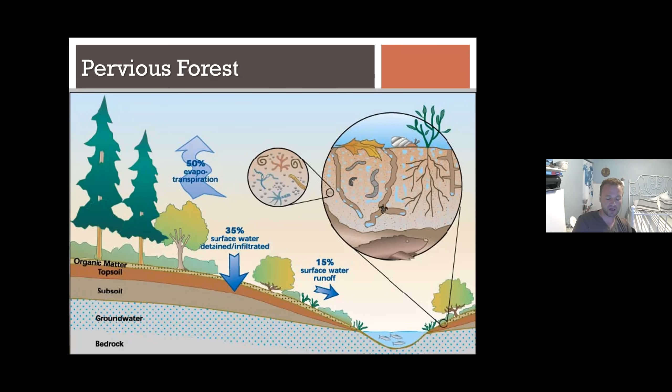And then once it does reach the ground, 35% of the water soaks into the soil. So some of it just stays on the surface, some of it soaks down deep into the aquifer, and very little of the water actually runs off into what will be a creek or a river or a lake or Puget Sound.

And so what's happened though is that we've come in and developed, and we've replaced these what are called pervious areas. Pervious just means water soaks into it, with impervious areas. So roofs and driveways and parking lots and roads, gravel areas. Pretty much most modern development is a hard surface of some kind. And so one, it almost completely eliminates any evaporation and transpiration mechanism.

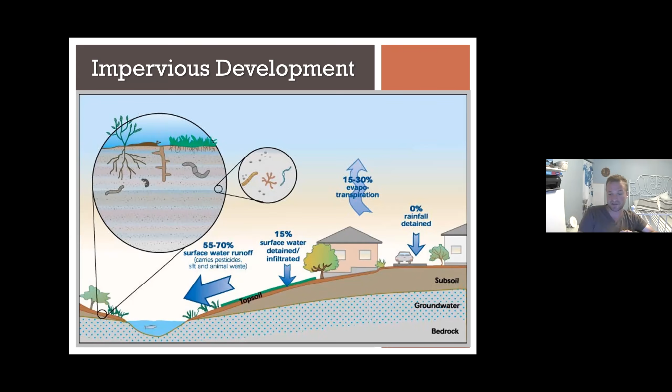So only about 10% of the water, well, this is 15 to 30, I think it's actually a lot less than that, goes back up in the atmosphere after it hits a hard surface. Very little of it actually goes into the ground at all. And as we get rid of more and more landscaped areas, because we're putting down denser and denser development, less and less water gets into the soil and more of it runs off. So almost all the water runs off, and this creates all kinds of issues to the downstream.

So one of the biggest issues is flooding. I like to explain this as people getting on as traffic. So if everybody's trying to get onto I-5 at the same time, everything backs up. It works the same way with rivers. If all the water is trying to go to the river at the same time, everything backs up. One of the downsides of hard surfaces that we put in is that water moves very, very quickly over the top of it.

When a raindrop falls out of the sky in a forest, sometimes it will take days before it will get to the nearest waterway. And in urban developments, it will only take about 6 to 10 minutes to get to the nearest waterway. It just moves very, very quickly. And because of that, everything can back up. We get soil erosion. Because that water starts moving so fast, it picks up particles of soil that it would not normally pick up and moves them downstream.

So not only do we end up with deeper rivers and streams and slopes starting to fail and things falling into the water because the soil is moving, but we actually get sediment deposits on the downstream. So the Puget Sound ends up filling with a lot more sediment than it normally would have.

We get a lot of pollution. So things like trash and hydrocarbons from cars and brake dust and heavy metals all get caught up in that stormwater, and then they just go to the nearest drain and go to the nearest waterway. A lot of people tend to think that stormwater is treated the same way that sewage is treated, and that's not the case. Most stormwater just goes straight to the nearest creek or stream and then goes right out into Puget Sound.

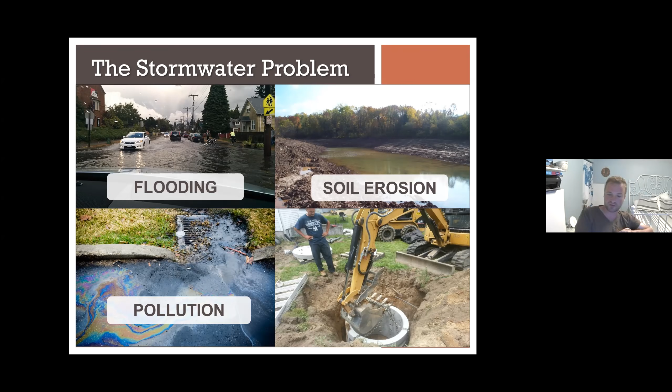And actually the #1 source of pollution to Puget Sound by a significant margin is stormwater. And then we end up with less groundwater because we're not infiltrating water. It's not going into the aquifer at all. So we end up actually mining water, because we're pulling it out faster from our wells than we are putting it back. So those are the problems that we're trying to solve, and that's why we have the stormwater systems around this area.

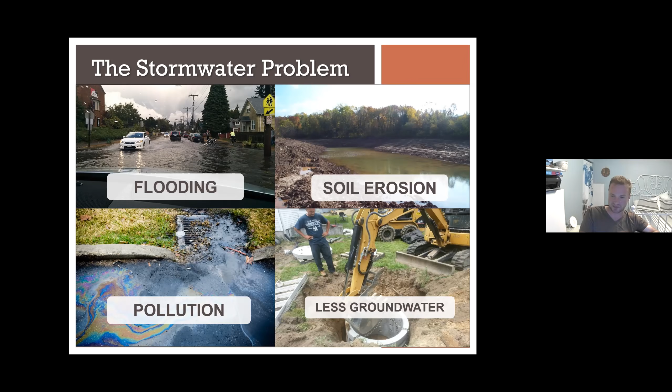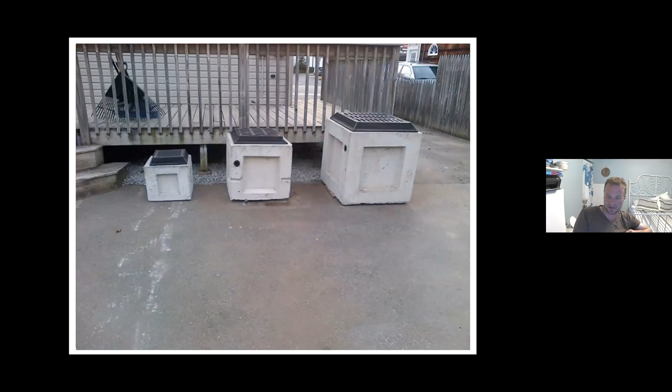So this is a standard. This is just what we would call a catch basin. I'm sure you've all seen these around. This is where stormwater goes. And this is what a catch basin looks like when it's out of the ground. It's just a big concrete box. And every one of those cutouts is a place where you would punch a hole for a pipe. And one catch basin leads to another catch basin, which leads to another catch basin, all the way down the chain until it outlets to usually a creek or a stream in the local area.

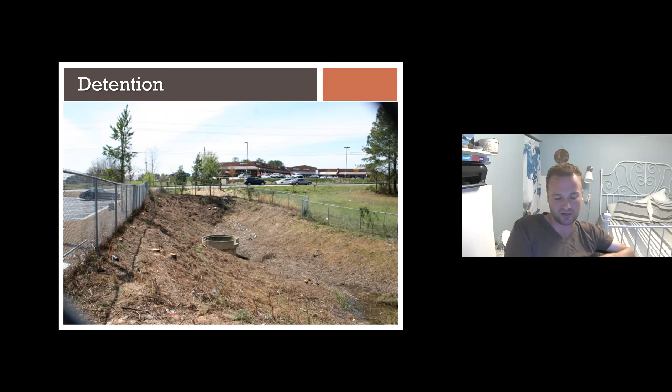So in order to combat that, they started doing this a little bit in the 50s, and it grew to much wider adoption in the 80s and early 90s. And the idea is that you dig a big hole and you let the water fill it up, and then you release it at a really slow rate. And that rate of release is supposed to mimic what a forest would release that water at.

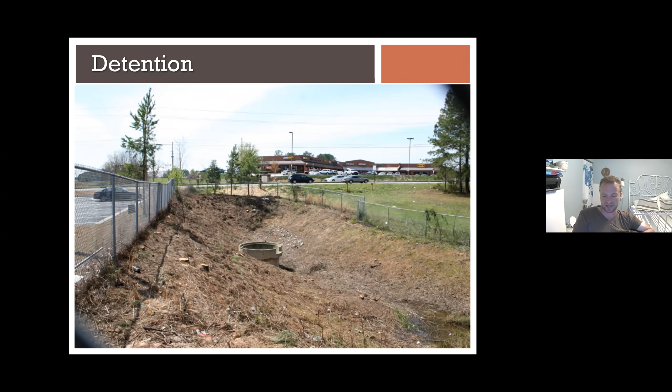So there's a bunch of in-depth modeling that goes into this, but basically you size these detention facilities to be able to hold as much water as second growth forest would. And so that's why these facilities exist. It's just basically a big volume storage area with a specially designed hole and an outlet structure that releases water at a certain rate.

An alternative to that is bioretention. That's something that we're moving more towards in this area. That's something that I specialize in. So this is just kind of a little plug for us in our program.

And this is another way of solving this problem, which is much closer to mimicking what happens in an actual forest. We're basically building an artificial forest on someone's property, or taking stormwater from local development, and you just dig a hole in the ground, you backfill it with a special type of soil, and you send water to it. And instead of then tying to a catch basin, which ties to the nearest creek, the idea is that most of the water actually infiltrates back into the soil like it would have 100 years ago.

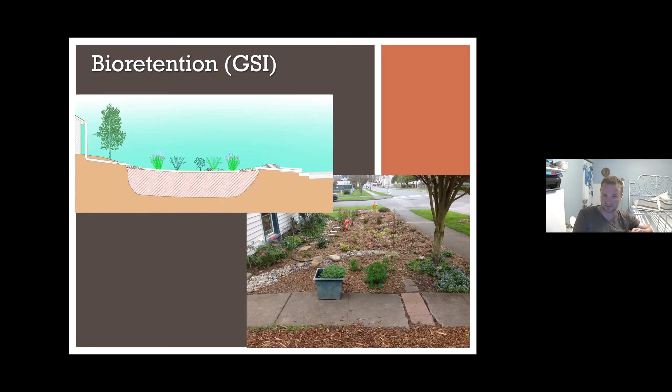And so that's the direction in general most new developments are going, but we still have to deal with all these detention systems that we put in and are continuing to put in with this current model for development that we have around here. In addition to detention systems, there's almost always some type of treatment to the water going to the system. So the most common type is called a cartridge filter system.

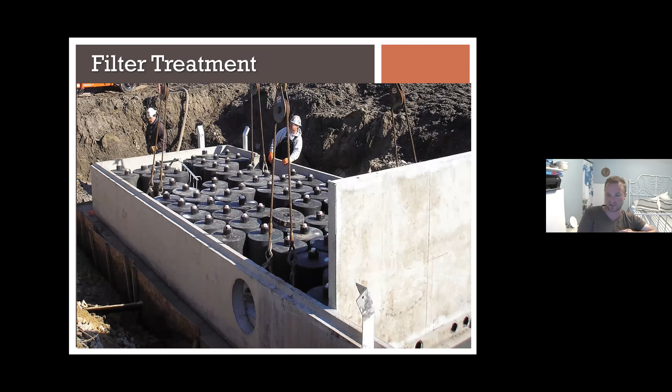We're going to go more into depth in this, but basically this is to remove pollution before it goes into the nearest creek or waterway. And it's just a giant Brita filter for the most part. It removes hydrocarbons and heavy metals and nutrients that would do damage downstream.

Sometimes you will hear people talk about detention versus retention. There is a difference between those two. Especially in Snohomish County, we don't do retention very often, but it does come up every once in a while. The difference is a retention pond is allowed to infiltrate. So it does do some soil recharge in terms of soaking water back into the soil, and detention is just pure volume storage.

But yeah, like I said, it doesn't work very well in a lot of Snohomish County because we have dense soils, and sometimes infiltration can be a bit of a challenge. So most of our systems are just pure detention, where you're storing a volume of water and then releasing it at a certain rate.

Every detention pond has certain elements that need to be inspected and maintained and that you need to be aware of. So they all have some kind of access ramp for vehicle access to get down. That usually includes a gate on the fence that's around it. They have an inlet for the water to be collected and then go into the detention facility, and then an outlet for the water to come out of the detention facility.

Usually those are on opposite ends of the facility because we want the water to pass all the way through the pond, because it gives it some settling and some water quality, some pollution removal benefit if it goes all the way through the pond. There's a pond bottom. Sometimes the pond bottom is wet and sometimes it's dry. We'll get into that a little bit more later.

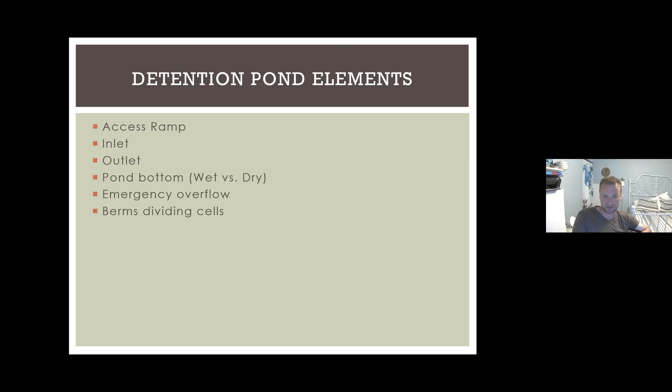And that's a very important document that I actually find most people don't have. So even HOAs that do have plan sets that show everything don't have the drainage report, which has the maintenance manual in it. So both of those documents really need to be gotten from the city. And like I said, the city can help you figure out where those are. So if you're taking notes, I definitely recommend you take a note to find those two documents if you don't have them.

So some of the things that you'll see in your detention ponds and on the plans are different types of catch basins. There's typically two types. Type 1 are smaller catch basins, as you see on the left here, and they're usually just big concrete cubes, and they have kind of that square grate on the top. There are also type 2 catch basins, and this is more like a manhole, and these are much larger. They can hold really large diameter pipes, sometimes up to 6-8 feet in diameter. They're much deeper, and they usually have a round manhole lid on the top.

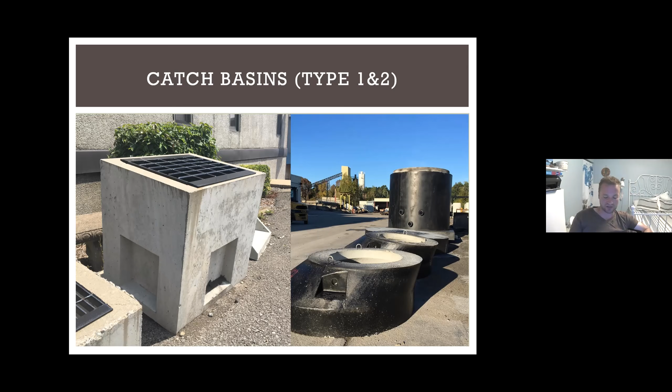And those need to be maintained differently because the type 2 catch basins are so significantly deeper than the type 1s. You usually need more technical expertise to clean out type 2s. And these do need to get cleaned out because they get full of sediment, and need to be checked to make sure they're not leaking and that the pipes are tight.

There's also a control structure. We're going to get a little bit more into this later, but it can be a fairly complicated structure. And this is usually on the downstream end of your pond or your vault. And basically, it's a very specifically designed structure that releases water at a very specific rate. Of all the things to maintain on your detention pond, this is one of the most important ones to keep in mind, because if this gets plugged up or is not functioning correctly, that can cause significant flooding downstream, and that needs to be addressed.

Fencing and security. Most of the ponds that you see out there have some type of fence around them. This is a liability issue. One thing I would mention is not everybody likes the look of the fences.

Fence is required basically if the side slopes are steeper than a 3-to-1, which most ponds around our areas are, and it's usually put up for liability. One of the drawbacks is it doesn't look very good, and it does tend to discourage maintenance. So things tend to get overgrown faster if you have a fence. So it's kind of an out of sight, out of mind thing.

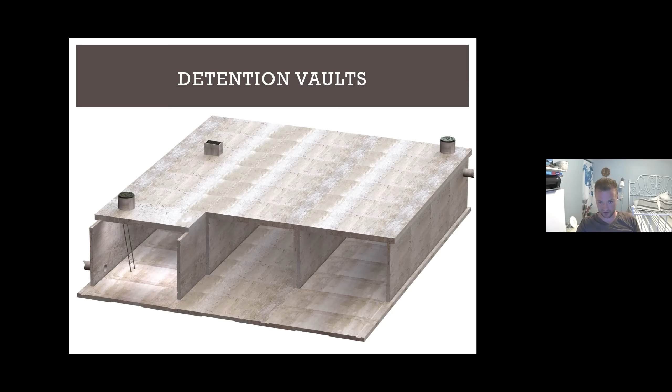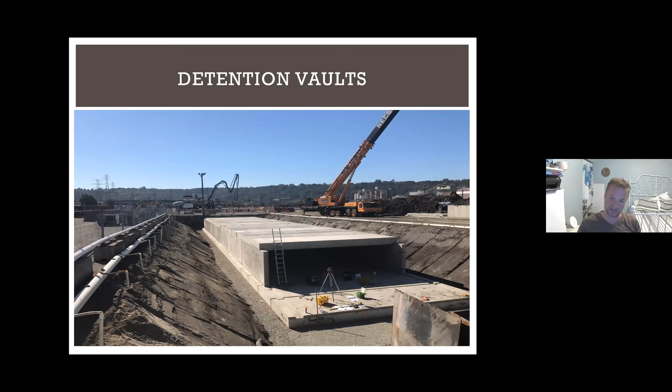Here's an example of some of these vaults that are put in. Like I said, they're very, very large facilities sometimes. Large enough typically that you can get a bobcat into the bottom of them. And that's in fact how they're maintained sometimes, is you just drive a bobcat around the interior when it's drained and scrape out any sediment that might be in the bottom.

Most of the ponds are planted with some types of plants. Grasses, trees, and shrubs are usually what's recommended. It is important that you try and keep these facilities from being overcome with invasive species, things like blackberry and Scotch broom and that type of thing. Plant maintenance does end up being a fairly significant portion of pond maintenance, making sure these things don't get too overgrown.

Common issues are things like cattails growing in this, which is native. It's not invasive, but the problem with cattails is that when they bloom, they put off this fuzz, and that can go in and plug up some of the orifices in the control structure. So this can involve a bit of maintenance. Usually it just involves some type of mowing and then getting in there and pulling or cutting down plants that are too large.

One of the other issues is if you get trees in there that are too big, they start eating up storage volume because they grow, and so your pond stops being the correct size that it is. So it is important to get there every once in a while and take out trees and shrubs that have gotten too big.

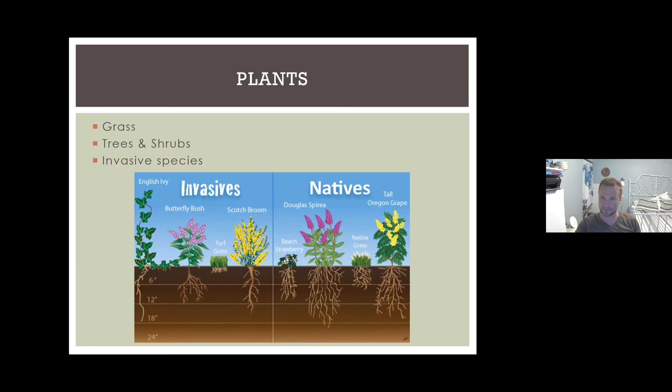So I had mentioned earlier the treatment cartridge filter. Like I said, these are just great big Brita filters. They're these big black cartridges that are filled with a special type of media that's been very heavily engineered to remove things like heavy metals and pollutants and hydrocarbons and nutrients. The downside of this is that, like a Brita filter, these things do get plugged over time. And so you guys are actually obligated under the maintenance requirements to change these every 3 to 5 years.

And that can be a bit of a cost to the HOA. So if you have not discussed that with your HOA, it's something that does need to be addressed and planned for. And if it has been a number of years since these have been changed, you're probably obligated to go in there and change them out. And it usually does require some type of professional to come in, and they use a special type of crane to lift these out and replace them, because these things are very heavy.

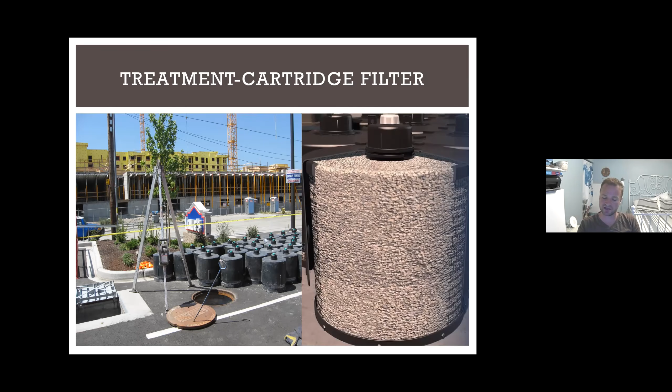And again, you will find out if you have this type of media filter system if you look at your plans. And that drainage report will have a section in the back that explains your obligation for how often these need to be changed.

Another way of treating the water is what's called a bioswale. So this is basically what we talked about earlier with the bioretention facility or the rain garden. So it moves water kind of like a little stream, and a special type of soil is put in there. And as the water moves through the soil, it's cleaned and things are filtered out of it. And then usually before or after it enters the detention pond.

So get those plans, look at what's on there. If you do have questions about what you do have, feel free to reach out to myself or the city, and we can help you kind of figure out what's on there. But most of this inspection work is actually going to be done by private inspectors that you guys hire. That's an important thing about the City of Brier, is that the city itself does not do inspections to your stormwater facility. That's something your HOA or whatever body you're part of is responsible for, is hiring a private inspector. But you are obligated legally to do those inspections and to communicate that with the city.

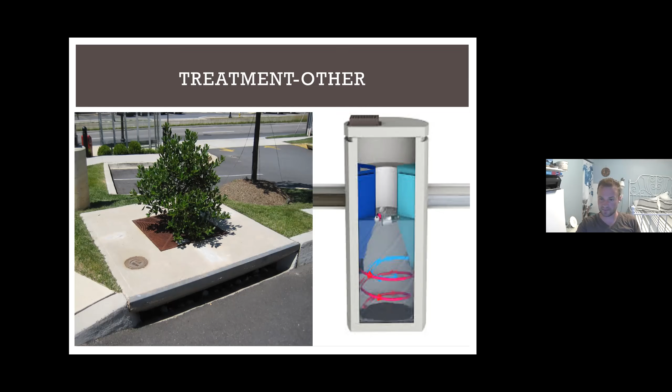So again, because we do treatments and then we have detention, there's usually two ways of doing this. One is called an upstream treatment chain and one is called a downstream treatment chain. In an upstream treatment chain, the treatment comes first and then the water goes into the pond. And then in the downstream one, it's the opposite of that. The water goes into the pond first and then into the treatment. And this is only important because you need to know that you have treatment and where it could be located. And the people that are going to do the maintenance will have slightly different requirements for the upstream treatment chain versus the downstream treatment chain.

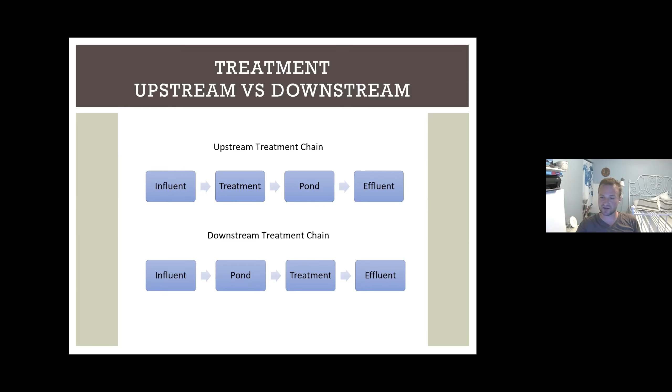Well, before we move on, are there any questions? I know this is a pretty dense topic, so I want to take a minute to see if we have any questions or people that are confused before we get into the more technical side of what maintenance actually requires. Give you guys a minute. None are in there right now, Derek, but yeah, again, feel free to ask at any time. I can interrupt him and ask your question for you. Cool, thank you.

Derek, this is Jennifer. I just wanted to jump in that one other type of detention structure or facility that we have around Brier are just detention pipes. Yes, yeah, thank you. I'll cover that. I don't have a picture of that, but thank you for the reminder. So yeah, another way of doing detention is basically you have a really large diameter pipe between two catch basins. It works the same as a vault, except instead of a big cube, it's a big cylinder.

And those do have their own slightly unique maintenance requirements as well. Usually they need to have the sediment sucked out of them in a special way that's a little bit more tricky than a detention vault, just because the access is a little bit more difficult. So if you don't have a vault or a pond, there is a good chance that you might have a pipe instead. And that's also something that you're obligated to maintain.

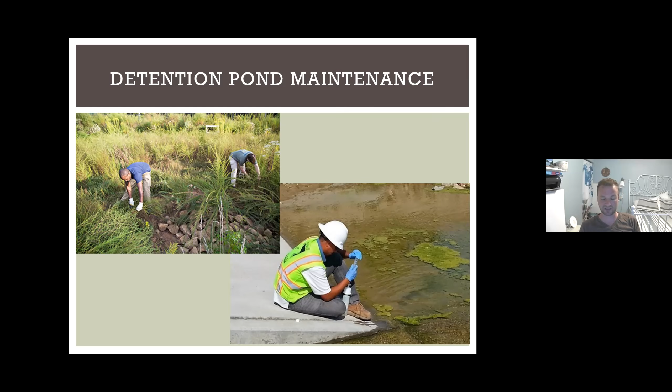We'll get a little bit into what you're legally obligated to do. First thing you need to figure out is what in fact you own. This will be a little bit different depending on the structure of things like HOAs or local cooperatives.

Most of the time, these systems are going to be located on private property. There are probably a couple of locations in the city where it's located on city property, or it's located on private property but the city's obligated to take care of them. But in most of these cases, they are located on property that's owned by the HOA, and the HOA is responsible for it. Figuring out what condition it is in is really important.

It's not uncommon for HOAs to be kind of surprised that they have these facilities and start to realize that they haven't been maintained in a long time. And if they haven't been maintained in a long time, the obligation to maintain them gets higher, and there will be more legal pressure on you to get in there and bring it back to code. I'll get into maintenance costs in a little bit, but generally it's the same as maintaining everything.

If you stay on top of maintenance early and you keep on it, it's going to be much cheaper in the long run than if you ignore it for a number of years and then have to do it all of a sudden. I have consulted with a number of HOAs that got surprised that they had to maintain it and then had to go back and do it. And it was quite expensive for a number of them, much more expensive than if they had just maintained it yearly from the beginning.

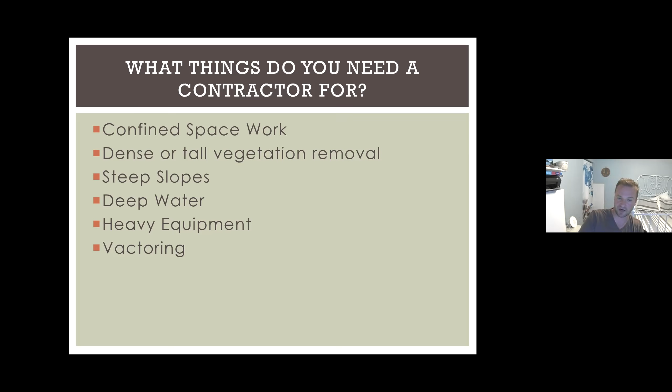That usually needs to be hired out. And then vactoring: a vactor truck is just a giant vacuum that's loaded on a truck, and it's designed to suck sediment out of things. Oftentimes catch basins or the inlets and outlets of the structure need to be sucked out, and a vactor truck is needed in order to do that. And that's another thing that you may have to hire out for.

If you want to get into kind of the nitpicky detail of what you are obligated to do legally and the thinking behind it and some of the engineering, there are a couple places you can go. The big one is a Stormwater Management Manual for Western Washington. That is produced by the Department of Ecology. And it's a pretty dense, thick manual, so it takes a lot of reading, but all of the requirements that you are obligated to are listed in that manual.

And then on top of that, if you're in the City of Brier, it will be local municipal code that will dictate what you do and do not have to do. But most of that is actually a function of Department of Ecology's rules. But there can be some variation from city to city on how some of these things are obligated and what you were required to do.

For vegetation, usually trimming and mowing is the big thing, just getting in there and making sure these things don't get too overgrown, removing invasives, and then figuring out what to do after you trim and mow with all the green waste. There can be significant levels of debris, plant debris and leaves and that type of thing. So you need to get in there and clean those out so that they don't plug the system up.

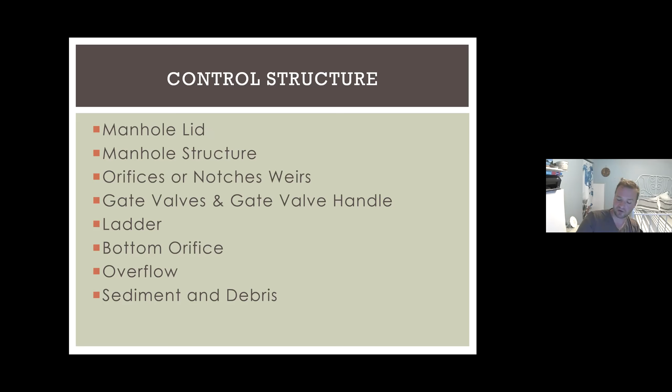We're going to get a little bit more into control structure. So this is basically a great big manhole that's located on the downstream end of every pond or vault.

And in it, actually, is my mouse showing up okay? Can you see it? Oh, yes, I can see it.

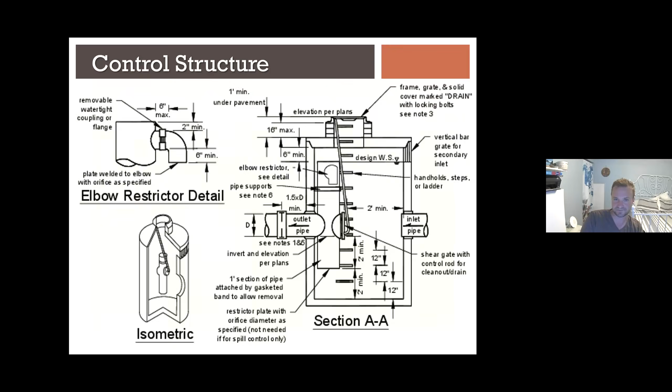Trash and debris removal is another thing that needs to happen. Usually, coffee cups and garbage and basketballs and that type of thing end up in these ponds inevitably, and that needs to be removed so that everything flows well. Over time, if it's been a long time since the system's been maintained, it'll just fill with sediment. So dirt from the upstream and plant debris and that type of thing will start to fill it up, and that will reduce the volume of the facility. At some point, you'll need to get somebody to get in there and remove that for you.

And then another thing you need to look out for is erosion, making sure that the side slopes of these facilities are not collapsing due to the rushing water.

So what does a failed system look like? The most common one is flooding. So all of a sudden the pond is much fuller than it used to be. It doesn't seem to be draining well. It's causing backstream issues. All of a sudden pipes are full of water that didn't used to be full of water. So that's something they definitely want to look out for.

Pollution. So if these things have an oil slick over the top, or they're just full of garbage, that's another way that these things will fail. Over vegetation, we've talked about a couple of times, just too much vegetation down inside of it. Filling with sediment, we just talked about. Slope failure, that's usually erosion or some type of thing that's caused the slope to move or crack in a special way.

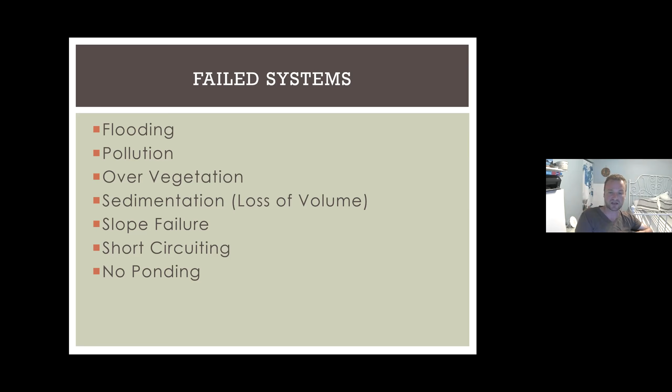And then another significant issue would be if it never ponds. If you never ever see water in this, even during a really intense rainstorm, that's usually a problem and not a good sign. So that's what a failed system usually looks like.

Like we mentioned, you are probably going to need to hire a contractor at some point. It's really important that you hire somebody that's licensed and insured. Previous experience is really, really important. It is common sometimes for people to just say that they've done this stuff or say, oh yeah, I can kind of figure it out as I go. And I have had a number of homeowners that have run into problems hiring people that didn't really know what they're doing, and ended up doing damage to the facility. So ask some good questions.

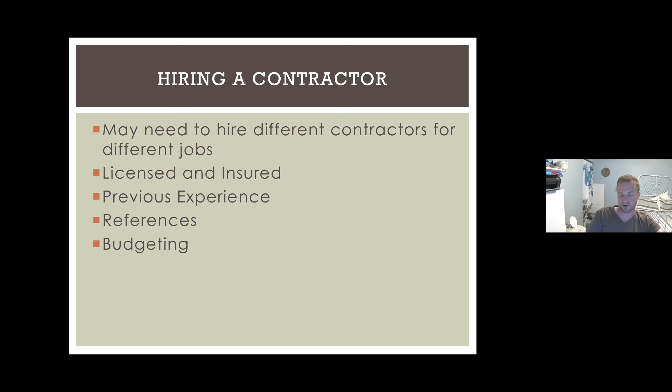Make sure you get a number of bids when you're going out. Get at least 3 bids when you're doing this process. Get references, and then make sure that you get cost estimates from the contractors and that you budget appropriately every year to go in and do this maintenance.

Inspection and reporting. You do need to maintain a regular schedule. You should stay in contact with the city on this. Like I said, you're obligated. The city lets you know via that letter that you're obligated to have these inspected every year. And so keeping on top of that is important.

It's really important that you have somebody in your HOA or other organization documenting the stuff that comes in. You need to document when it was cleaned. You need to document inspection. Anything that looks odd, I highly recommend you take pictures of. And like I mentioned earlier, it's really, really important that you get those existing plans and that existing drainage report and have those on file that you can reference as you're working on these facilities.

So budgeting is usually one of the biggest things that comes up. I didn't really get into wet ponds versus dry ponds yet, but basically a wet pond is a facility that stays wet on the bottom all the time. I'd say probably 40% of the detention ponds that are designed are wet ponds, and then 60% of them are dry, where they will dry out in the summer or when it's not raining.

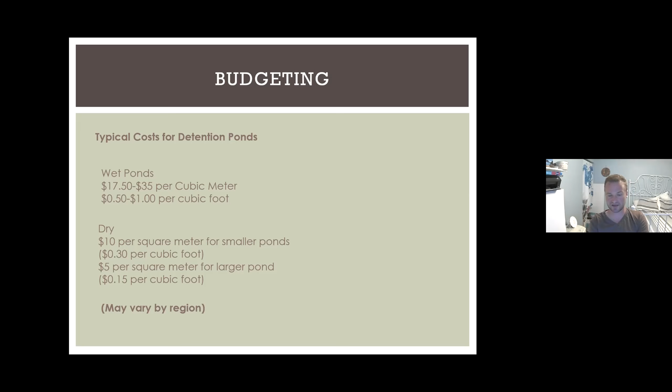Wet ponds are a bit more expensive to maintain than dry ponds in general, but wet ponds do provide a water quality benefit. So sometimes if you have a wet pond, they don't have upstream cartridge filter systems or anything like that. So that can save you money in the long run.

If you do the routine maintenance, you do it every year. You're usually looking at between, I'd say probably $200 is probably in the very low end. So $600 to $1,000 a year that you need to budget for to get people in and just do the inspection, take care of everything, make sure everything is good.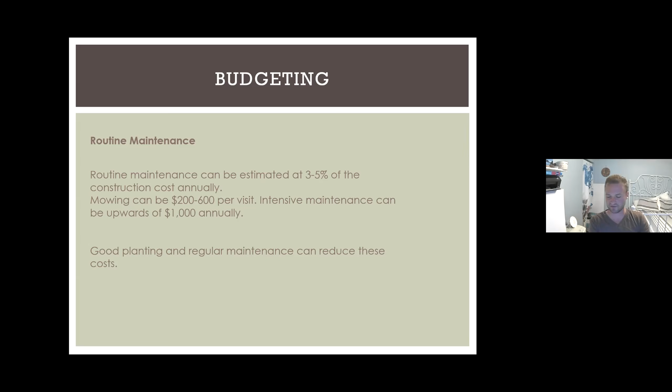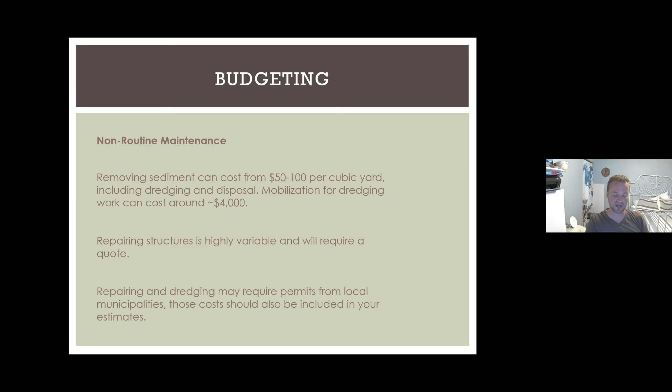Non-routine maintenance. So if it has been a long time since this thing has been cleaned out, it can cost quite a bit. I have $4,000 listed here. I have had HOAs spend as much as $30,000 trying to bring a system back online that's failed significantly because it hadn't been maintained, and that was quite a sticker shock for a lot of those homeowners. So again, if you stay on top of the maintenance early, it will save you money in the long run.